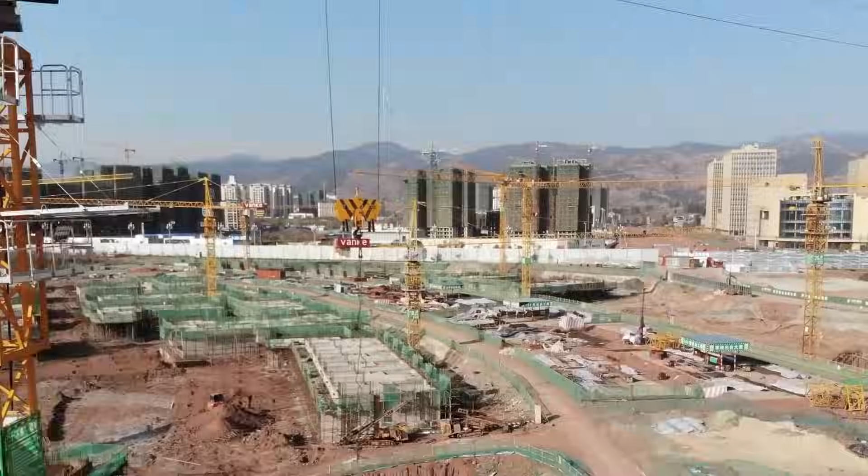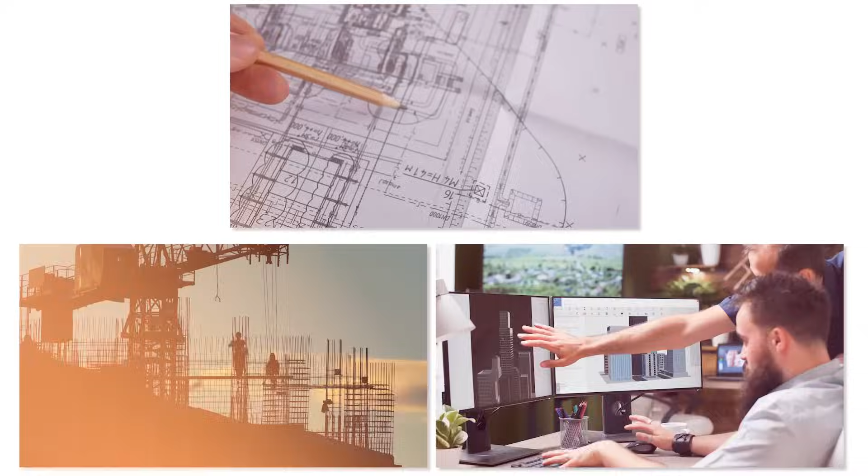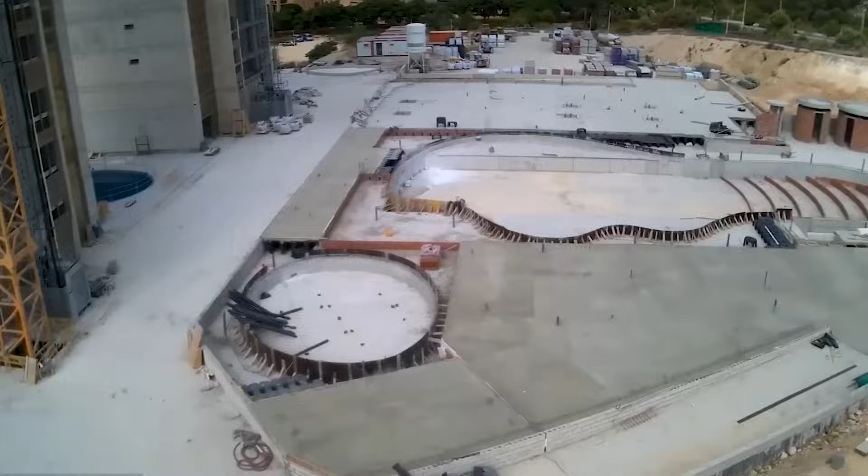The biggest construction mistakes in the world. From an architectural mistake that ended up creating one of the most iconic landmarks globally, to a tragic incident where a building collapsed in China, starting ambitious construction projects can unveil extraordinary engineering and architecture achievements. But sometimes things don't happen as planned in construction. Even a tiny mistake can lead to big challenges and surprises. Some mistakes are more than just a little glitch, but they can cause serious damage. Now, let's look at some of the biggest mistakes ever made in construction.

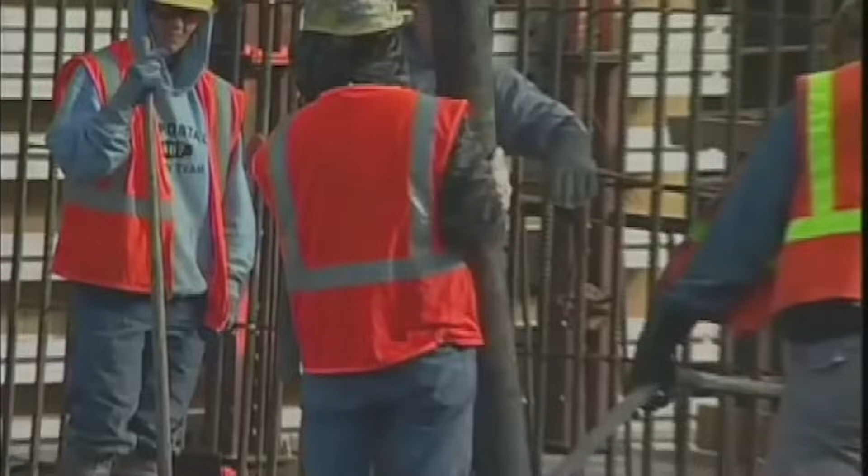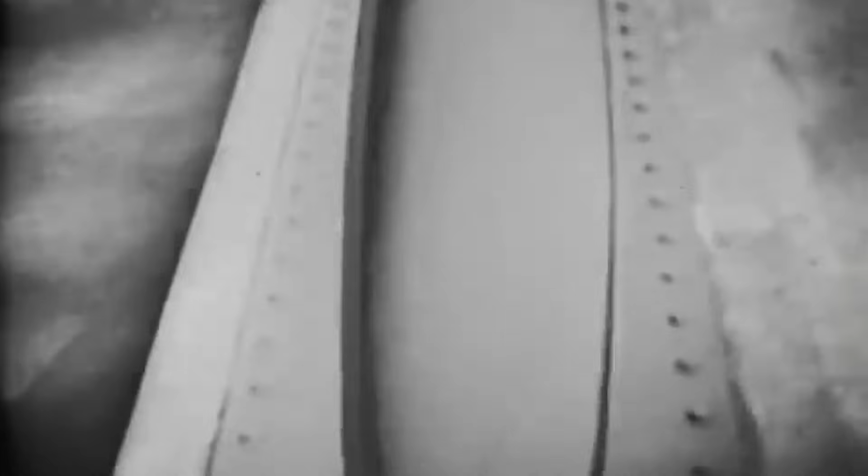The reason it fell down was because it had a big problem with how it reacted to the wind. Even in regular winds, it would wobble and bend. When the wind got really strong, the bridge couldn't handle it. On the day it collapsed, the wind was blowing at 19 meters per second. The bridge twisted and turned because of something called aeroelastic flutter, and then it fell into the water. Luckily, no one was hurt when the bridge fell.

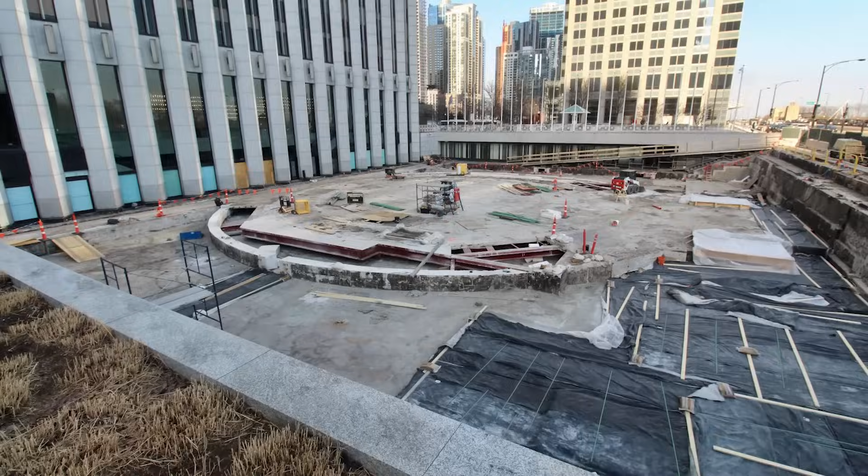Number 11. The Aon Center. The Aon Center, originally known as the Amoco Building and built in 1974, is a really tall and cool building in Chicago. At first, people were amazed by its simple shape, and the fact that it was covered in marble from Italy, making it the biggest marble-covered building in the world. But there was a problem. The marble was too thin, so it started to crack. Pieces of it even fell off and landed below. This was dangerous, so they had to fix it. In the 1990s, they decided to replace the fragile marble with stronger granite. This fix cost a whopping $80 million.

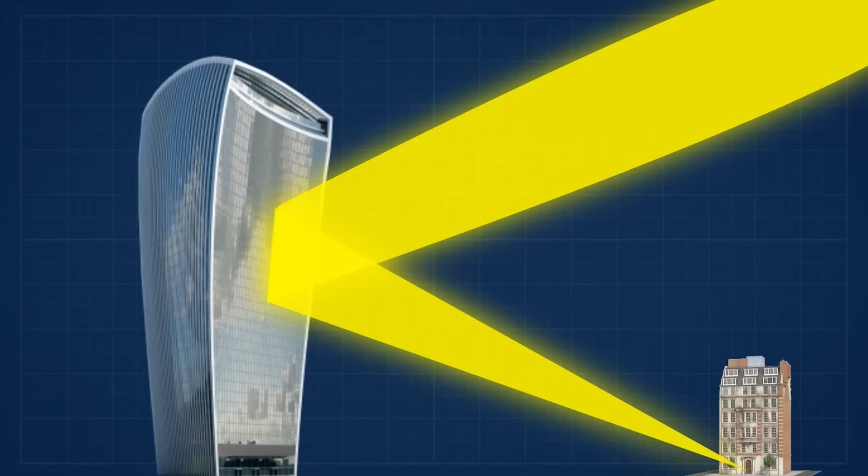Number 10. The Walkie Talkie turned Walkie Scorchy. In the heart of London, there's a big building called 20 Fenchurch Street. People call it the Walkie Talkie because it looks different. It was finished in 2014 and cost more than £200 million to build. But there was a big problem. The building has a glass front that curves, making it act like a giant mirror. This mistake meant that, for about 2 hours every day, the building reflected the sun onto the street below. The sunlight was so strong that it caused a lot of heat, as hot as 72 degrees Celsius. Because of this, things started going wrong.

Tiles on the building cracked, carpets got burned, and even paint and cars started melting. People gave the building a new name, the Walkie Scorchy. To fix the problem, they had to put a special sunscreen on the curved part of the building, but fixing the mistake cost another £10 million.

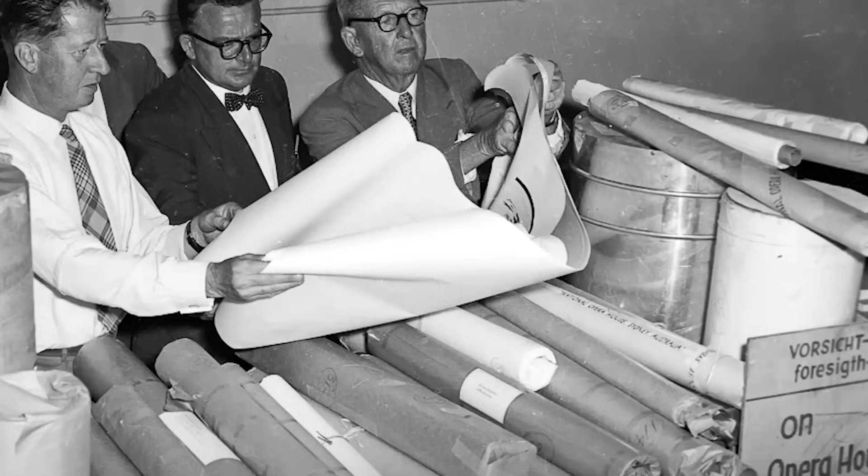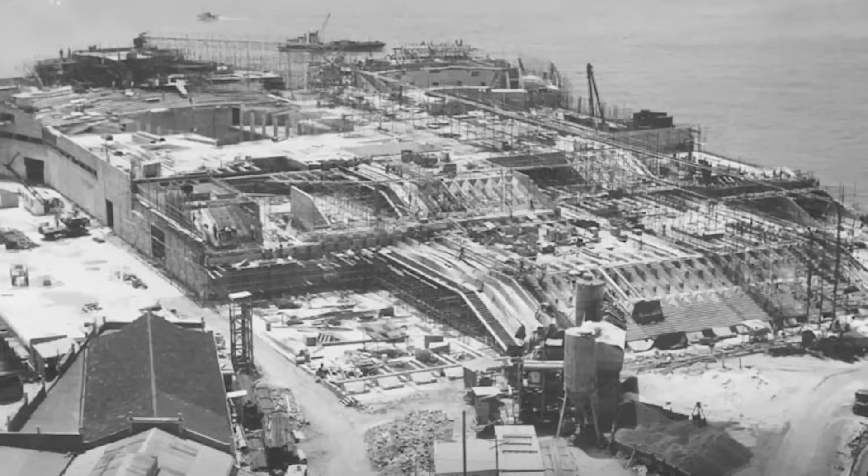Number 9. Sydney Opera House. The Sydney Opera House is famous worldwide, but it went through a lot of problems during its construction. Even though it looks amazing, it's considered one of the world's failed projects because it took much longer and cost a lot more money than originally planned. The plan was to finish building it in 4 years, spending about $7 million. However, it ended up taking 14 years and costing a total of $102 million. That's a big difference. The trouble didn't stop there.

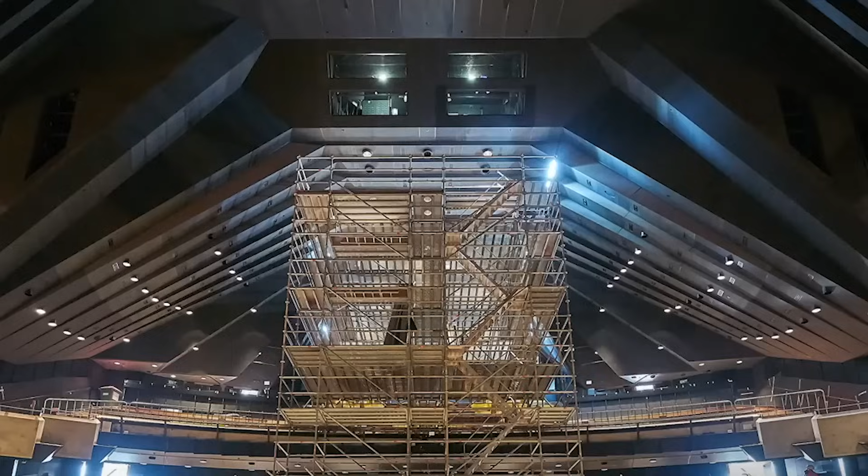When the opera house was finally done, the musicians had a hard time hearing their music properly. This was because of mistakes in planning and construction that messed up the acoustics, or how sound travels in the building. To make things even worse, there was a mix-up in where they put the opera house and the stage production halls. Fixing these mistakes cost an extra $300 million.

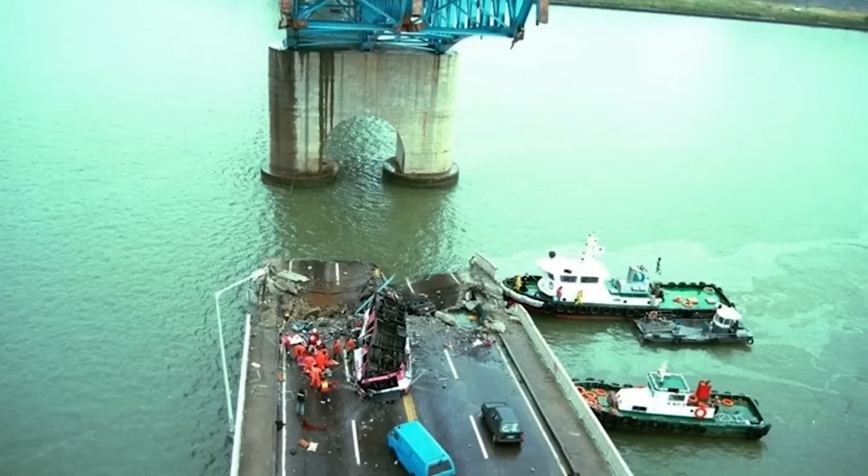Number 8. Seongsu Bridge Collapse. In 1994, something very sad happened in Seoul, South Korea. The middle part of the Seongsu Bridge fell into the Han River, and 32 people lost their lives. The bridge was supposed to hold cars that weighed up to 36.3 tons, but some cars that were much heavier, 47.3 tons, used it regularly. Because the bridge had to handle more weight than it was designed for, and there were mistakes in how it was built, it collapsed.

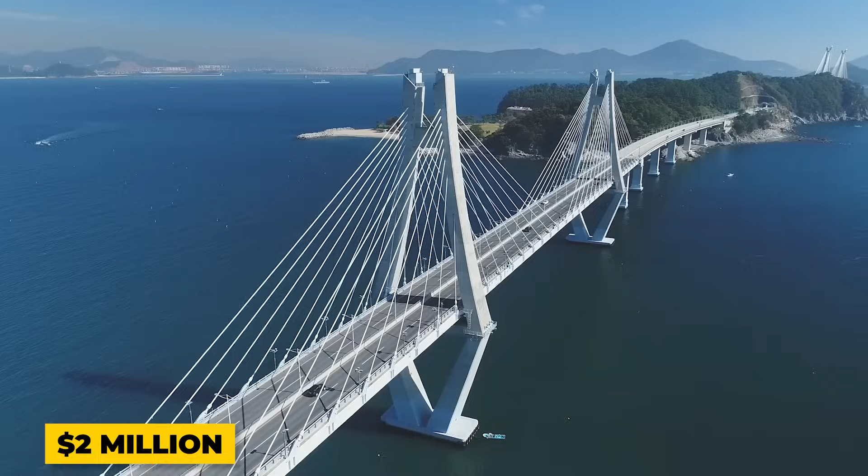After investigating, the government had to pay $185,000 to the families of the people who died and $2 million to fix the bridge. They found out that some important repairs and checkups were not done like they should have been.

Number 7. Lotus Riverside Disaster. Lotus Riverside is a group of homes in Shanghai. In 2009, one of its tall buildings fell down. Luckily, it didn't cause more buildings to collapse. People left the area in time, but sadly, a construction worker died in the accident. The building fell because it was made poorly and didn't follow the right construction rules.

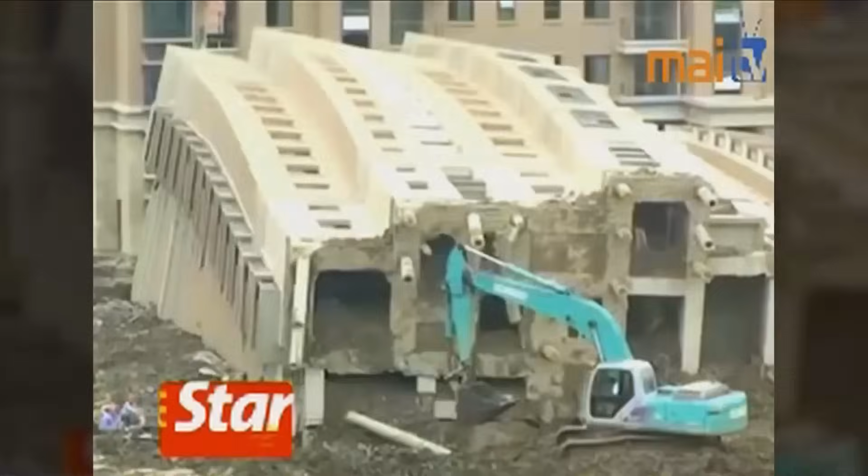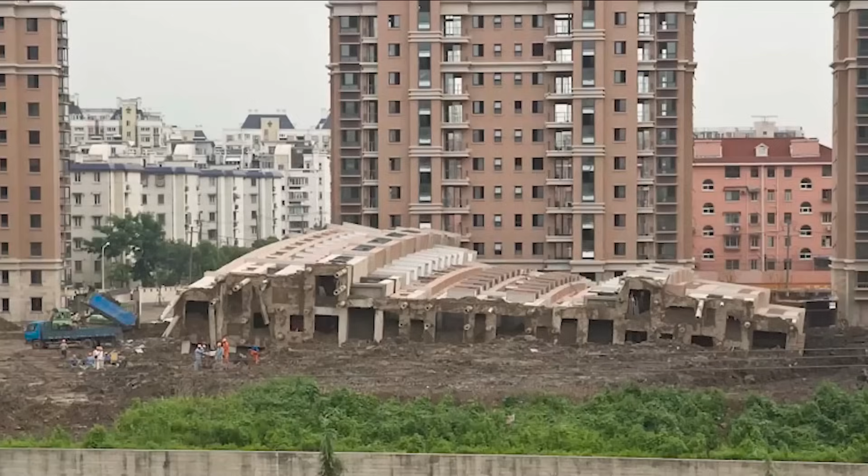The builders were accused of caring more about finishing quickly than doing a good job. The people who built the homes had to pay a lot of money. They had to give $30 million to the people who owned the homes and pay for fixing everything. It's a sad event that reminds everyone how important it is to build things properly and follow safety rules.

Builders should always care more about doing a good job than doing it fast.

Number 6, Sampoong Department Store. The Sampoong Department Store in Seoul was supposed to be a small building with 4 floors, but it became a big problem because people rushed to finish it quickly. Just like a similar situation in the US at the Hyatt Regency Hotel, South Korean construction companies were in a hurry because foreign companies couldn't help, and there was a big rush to build things for the 1988 Seoul Olympics.

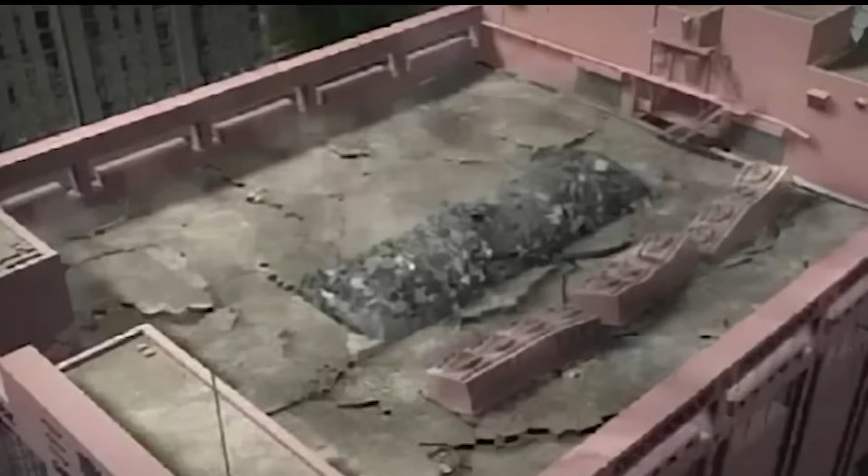Originally, they planned to make the Sampoong building a simple 4-story home. However, in 1987, the person in charge suddenly decided to change it into a large department store. They messed up the structure by taking out some important parts to make room for escalators. The construction team used concrete slabs that weren't strong enough, making the building unsafe.

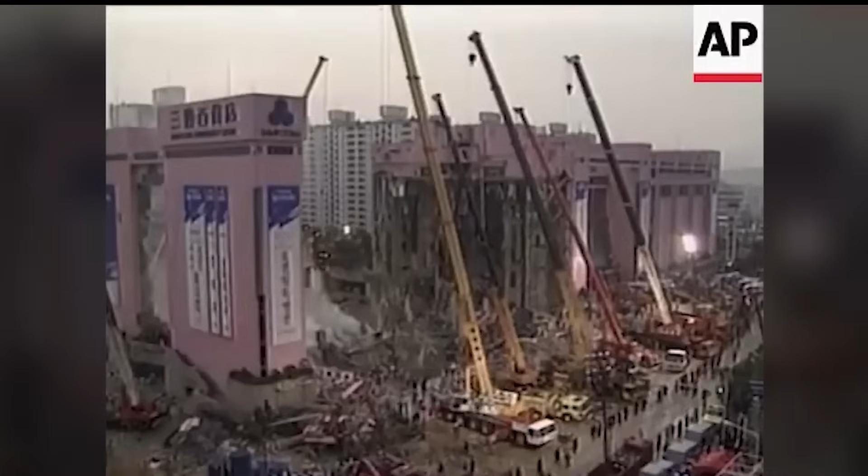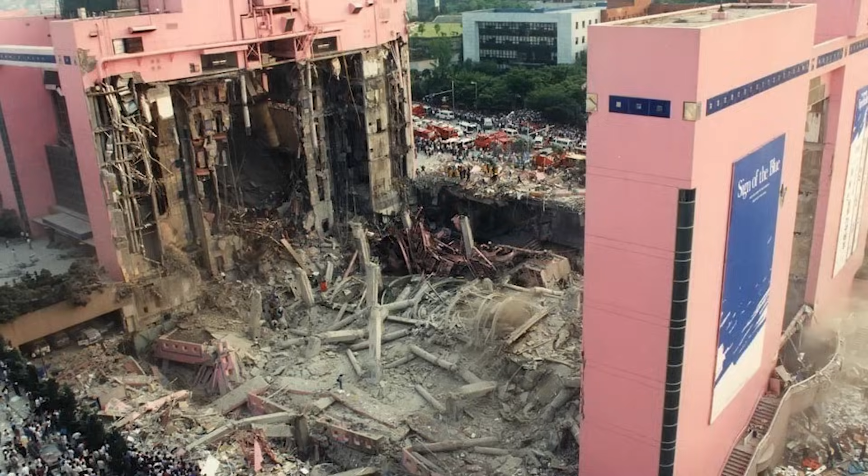The building opened in 1990 and attracted many people, but because of its structural problems, it collapsed on June 29, 1995. Cracks appeared in the building's ceiling months before it fell down, but the people in charge didn't do much to fix it. Even though there were warnings, they didn't close the building and only told people to leave 5 minutes before it collapsed.

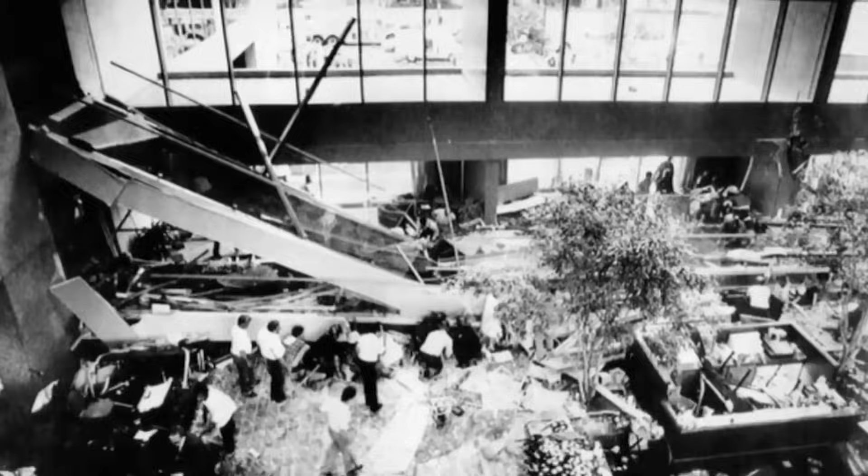Number 5, Hyatt Regency Hotel. The big Hyatt Regency Hotel, with 40 floors, started being built in 1978 and needed to be done quickly because of money problems in the construction world. Even though it looked cool when it opened in 1980, there was a big problem with the design.

The lobby had these fancy walkways made of steel, glass, and concrete on different floors. People liked to gather on these walkways, especially for events. Then, on July 17, 1981, during a crowded event, something terrible happened.

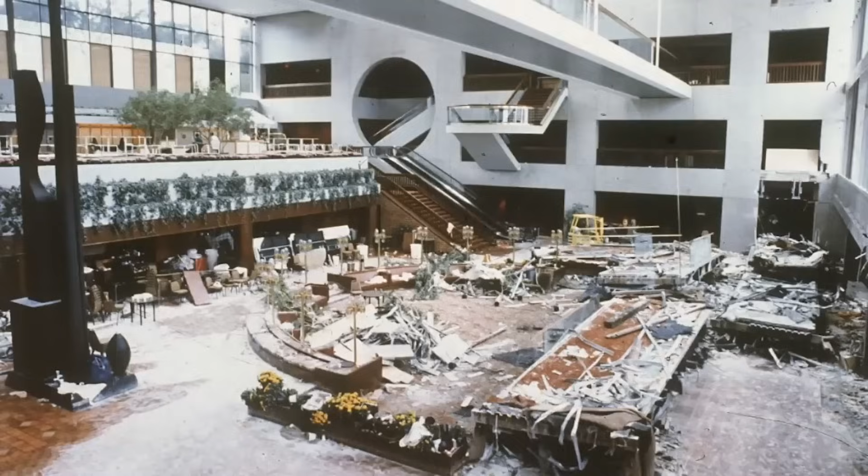The walkway on the 4th floor, which was supposed to hold up both itself and the one on the 2nd floor, suddenly fell down to the lobby. This was because the design was changed during construction and the 4th floor walkway couldn't handle the weight. An investigation found that if they had checked things properly before building, they would have seen the problem.

Number 4, The Leaning Tower of Pisa. The Leaning Tower of Pisa is famous because it doesn't stand straight. This happened because it was built on ground that couldn't support its weight. The problem became clear while it was being built.

In the 1800s and 1900s, people tried to fix it. They worked hard and managed to make the tower tilt less, from a big lean to a smaller one, about 3.9 degrees. The tower's base wasn't strong enough, causing it to lean as it went up.

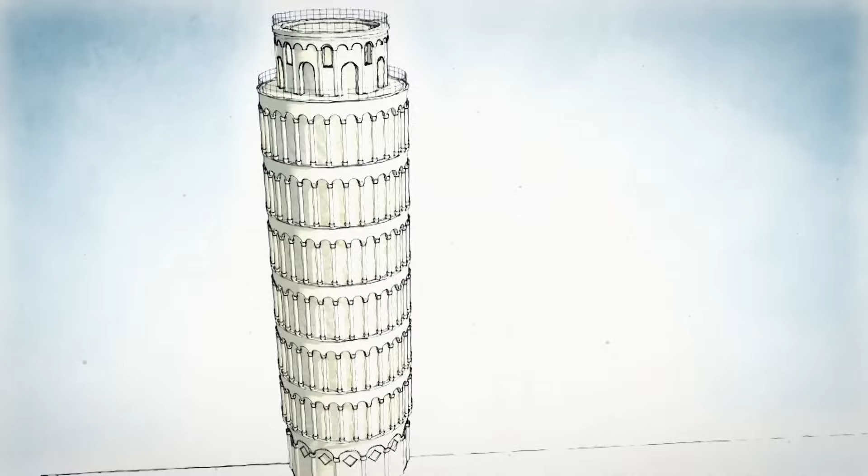To rescue it, builders tried different things in the 1800s and 1900s. Surprisingly, their efforts did make the tower lean less, reducing it from a tilt of 5.5 degrees to 3.9 degrees. Now, the tower is not in immediate danger, and people are still working to keep it safe. The Leaning Tower of Pisa is a special building that teaches us about fixing mistakes and preserving important things from the past.

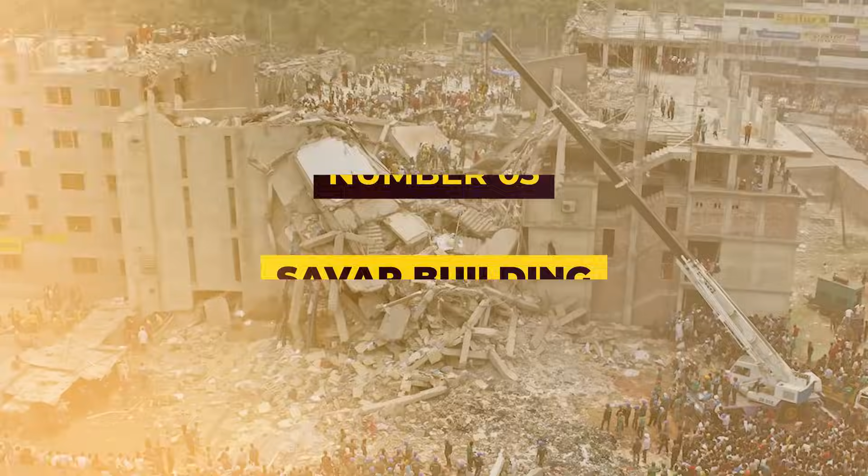Number 3, Savar Building. In 2013, a really tall building in Savar fell down and more than 1,100 people died. At first, the building was made without permission, and later it was changed from a regular store place to a factory without telling anyone. They even added 3 extra floors without asking.

Also, the materials used to build it were not good quality. Because of all these problems, the building collapsed, causing a big disaster. This sad event shows how important it is to follow the rules when building things and to use strong materials. It's a lesson about keeping everyone safe by doing things the right way.

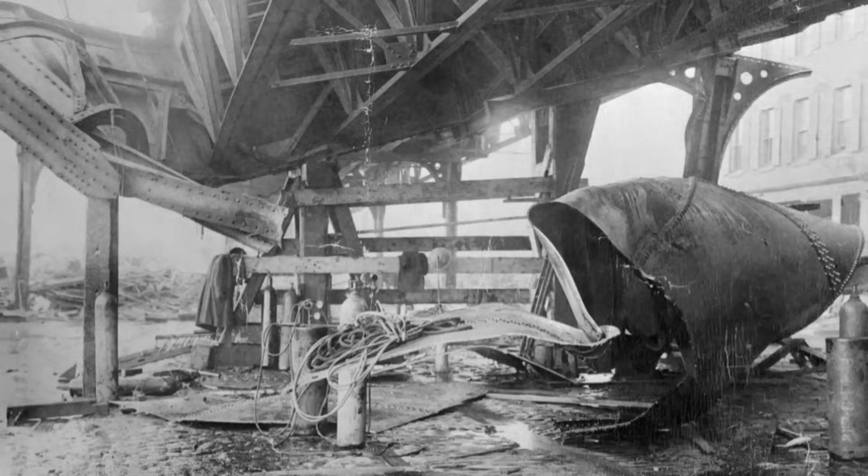Number 2, The Molasses Disaster. In January 1919, something happened in Boston. A super big tank filled with molasses, a sticky syrup, broke, and all the molasses spilled out. Imagine a wave made of molasses, like a giant sticky flood. This molasses wave was so strong that it broke a train track and lifted a whole train off the ground.

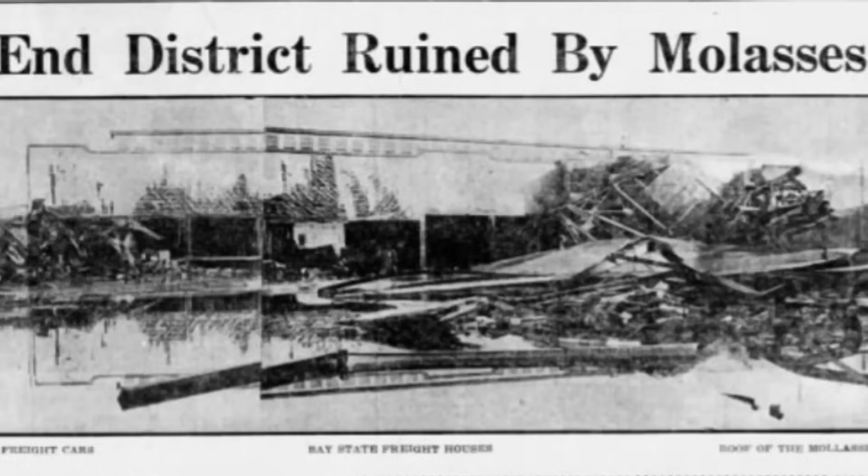The wave also knocked down buildings nearby and hurt a lot of people. Sadly, 21 people died and 150 got hurt. It was a really big disaster that everyone in Boston remembered. This accident showed how dangerous things can happen when something goes wrong with big tanks of stuff.

Number 1, Ibrox Stadium. Sometimes, sports stadiums have had problems with their structures, like what happened at the Hillsborough disaster in 1989 and the collapse of Ibrox Stadium in 1902. Ibrox Stadium, home to Rangers FC, was originally called Ibrox Park. It followed the design of other Scottish stadiums at the time, and people thought it was safe.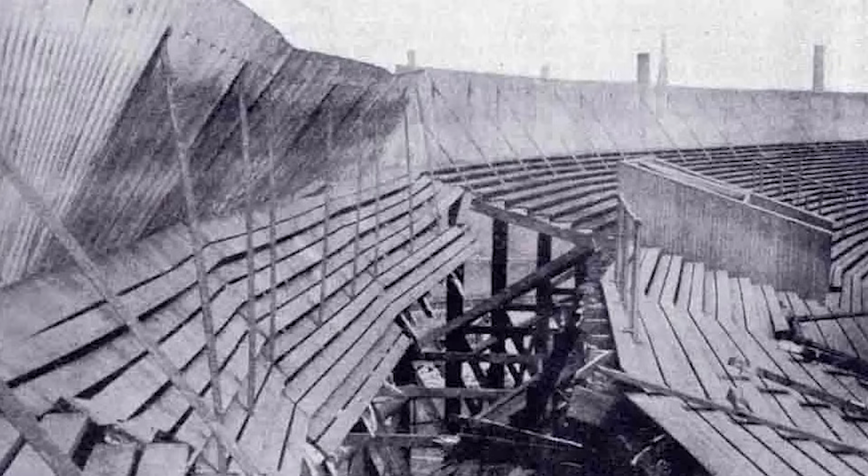The stadium wanted to host more football matches and finals, so they added a big terracing in 1902 to fit 36,000 more people. This terracing had wooden planks on an iron frame and got approval from local authorities. On April 5, 1902, during a Scotland versus England match, part of the terracing collapsed, and about 125 people fell 50 feet. People argued about why it happened, blaming the wood quality or the design.

The wood supplier even went to trial for homicide, but was found not guilty. They removed the wooden terraces in 1910, but hired the same architect to expand the stadium in the same year.